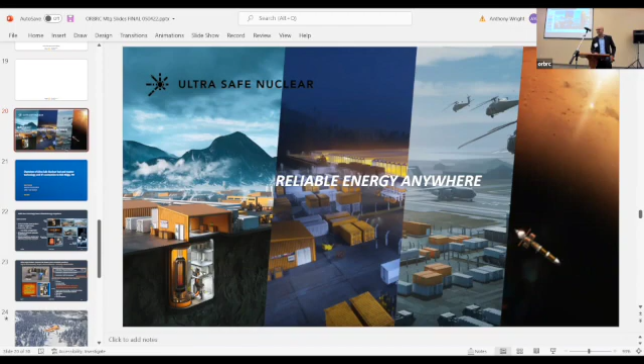Sure, I'll go to this one. Do you want to go full screen? We can see the slides a little better. Oh, really? Okay. I thought it handles it, but that's okay.

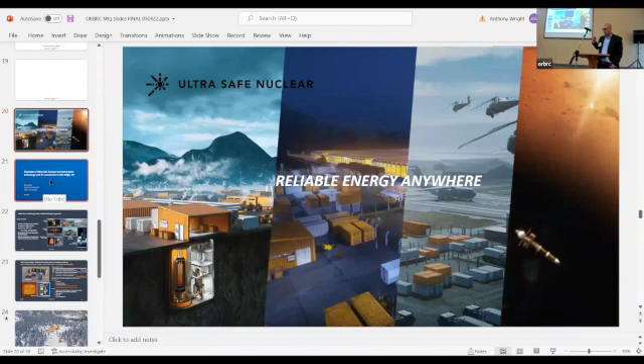Again, as Jim kindly introduced me, I'm Kurt Terrani. I'm talking about UltraSafe Nuclear Corporation. See our motto there, reliable energy anywhere. Let's go to the next slide. The purpose is, as Jim said, for me to tell you about what UltraSafe Nuclear is and what we are doing here in Oak Ridge. And I'll tie it into the local history here, okay? Let's go to the next slide, please.

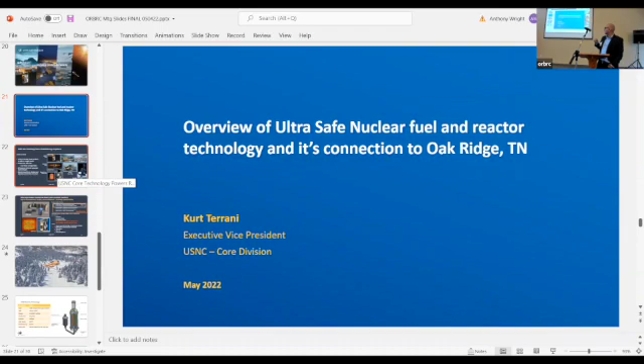We are an advanced energy technology company based on nuclear microreactors. Closer to the microphone, you got it. So we are an energy technology company focused on nuclear microreactors. Microreactors. We're not talking about a gigawatt of heat and electricity. We're talking about just a few megawatts, right? And our technology is high temperature gas-cooled reactors that are microreactors.

Our flagship products are the micro-modular reactor. These are reactors that you can ship to a site, you can build and deploy in a matter of like 30 or 35 weeks, not 15 years and 500% over budget. You know, these are small systems, and you can deploy. You don't need $20 billion, you need tens of millions of dollars to deploy them.

Our first project is in Canada, actually, in Chalk River. We have a joint venture with Ontario Power Generation. That's similar to TVA. It's a big utility in Canada. So that's our first project. And our follow-on projects are in the United States, in Illinois, in Idaho. There's a lot of studies going on in Alaska and elsewhere, okay?

So besides these land-based microreactors, we use the same principles and fundamentals of our technology to develop reactors that are not for Earth, they're for space. So either nuclear thermal propulsion, where you're using the heat generated from a reactor core to heat a gas and launch a rocket instead of burning chemicals, or reactors to provide you power on a lunar surface or Mars. It turns out the hydroelectric dams aren't working so well up there. So that's kind of the gist of the reactor products, right?

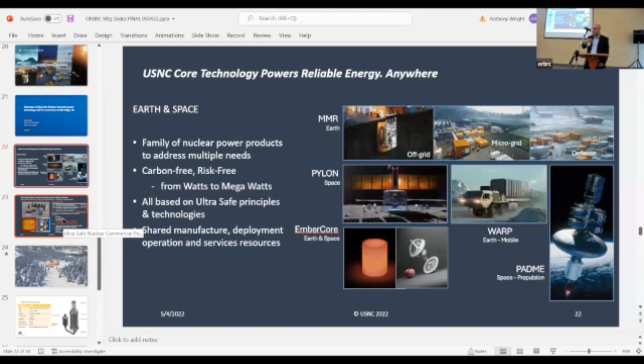So this is all just concepts, but I'm going to tell you a little bit about our philosophy and what we do, especially in my area, which is fuel. Let's go to the next slide. Okay, obviously you probably can't read this and you don't need to read this. Let me tell you what our philosophy is. The name of the company is called UltraSafe.

And basically, if you take a look at the nuclear reactors that exist today commercially, there's about 400 of them around the world. There's just shy of 100 in the United States. And these things are based on Rickover's water-based reactor, whether you like it or not. There's been a lot of reactors built and operated here in Oak Ridge in what Alvin Weinberg called the first nuclear era, a lot of different salt and gas and all these other cool systems. But we ended up using Hyman Rickover's reactor that he deployed for his submarine. These are gargantuan machines. They are, again, about 3 gigawatts.

That's a big number of heat, and about 1 gigawatt of electricity. And so they have this awesome power. They have a very large power density, which means within a small volume they're generating a lot of power. And so it made economic sense back then. They called it economies of scale. And so when you pack this much energy into a small volume, when something goes wrong, it really goes wrong.

And let me give you an analogy. I don't know if you guys watch Game of Thrones, but everybody knows the concept of a dragon. It's a very powerful, mythical beast. So imagine, the Rotary Club next week, you guys go slay a dragon. And you're like, hey, you know what? This thing is very powerful. Let's harvest its power. And then you put it in a cage. And Jim is like, you know what, folks? This is tricky if this dragon gets out. Let's put another cage around it. So we keep putting cages around the dragon to make ourselves feel really good that this beast is not going to get out. But it does eventually get out, right?

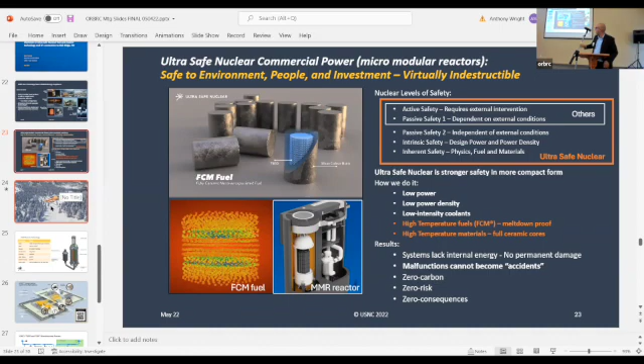Let's go to the next slide. I wonder if you can play this. Yeah, it looks like it.

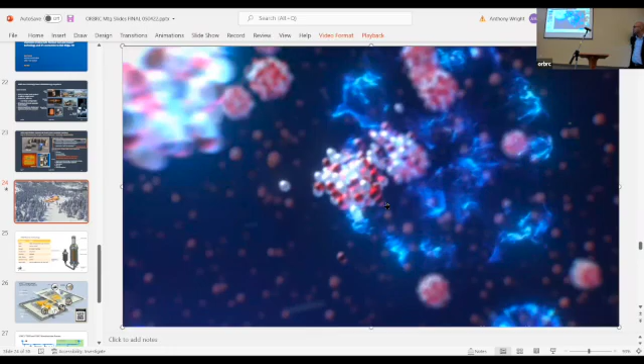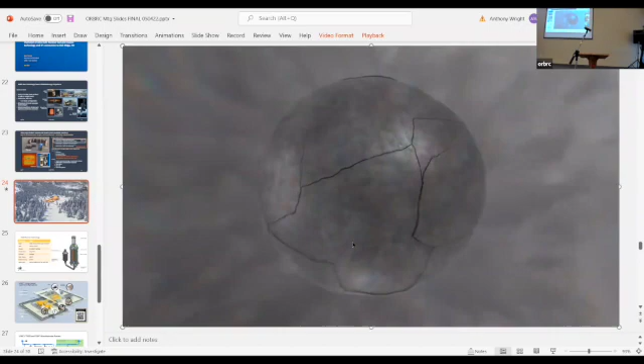This little guy packs a big punch. It's the size of a walnut and can release the same energy as 2,000 liters of diesel. Not bad for a rock. With so much power comes great responsibility. For as fission reactions take place, the uranium fuel is slowly transforming into roughly 1/3 of the periodic table as solids and gases. These are the radioactive fission products that make nuclear waste dangerous, and they must be permanently contained. So beyond generating heat, the fuel needs to trap the fission products in place.

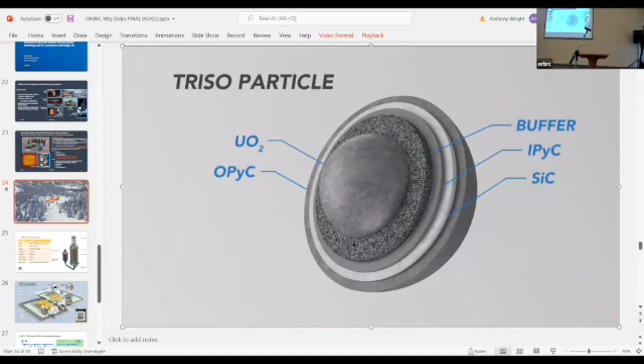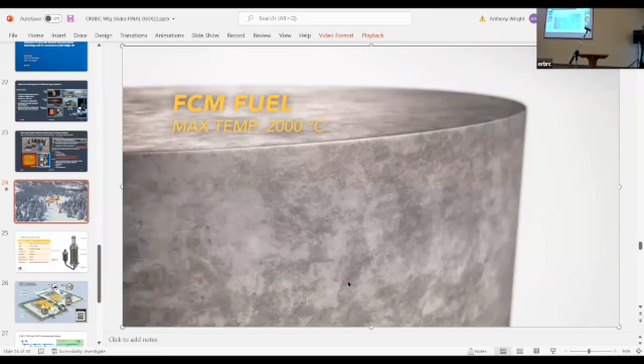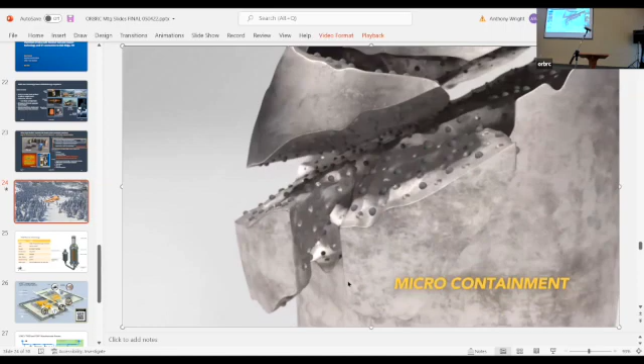In FCM fuel, millimeter-sized bits of uranium are trapped in tiny ceramic pressure vessels that can withstand extreme temperatures and radiation. These particles are then encased within a fully dense silicon carbide matrix, somewhat like encasing the fuel in a diamond. Silicon carbide is used for tank armor and has an extremely high melting temperature, far beyond the heat generated by the fuel. It is particularly resilient to radiation and does not chemically interact with other materials in the reactor. If the pellet is fractured, the fuel particles can remain intact as they are smaller than the smallest fragments. The core is assembled with enough fuel and graphite blocks to produce heat through self-sustaining fission reactions. This fully ceramic core has the lowest power density of any commercial reactor ever.

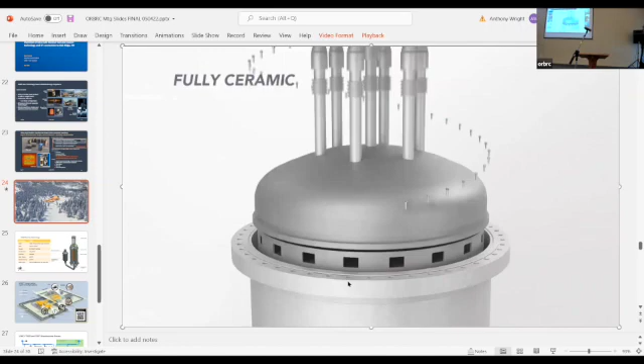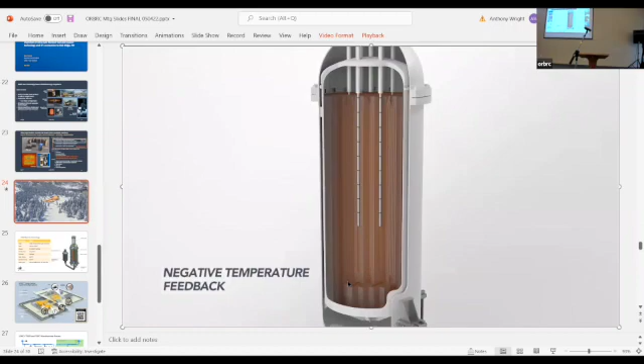Allowing it to easily dissipate excess heat. To power it up, control rods are withdrawn and the fission reactions can begin. But these reactions slow down at higher temperatures. So to keep producing power, the reactor has to be cooled. If cooling stops, the reactor automatically shuts down.

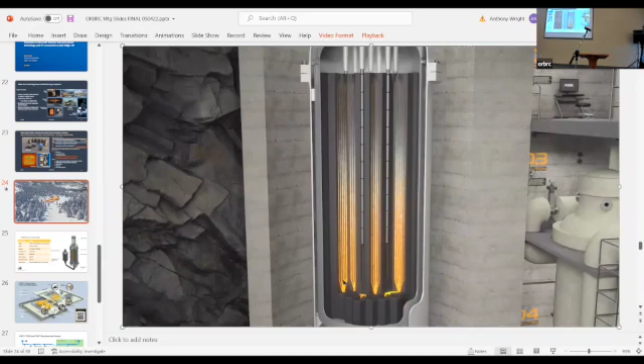Helium carries heat out of the nuclear core. It is a harmless, noble gas, completely unreactive and stable. And while somewhat inefficient, it is the safest coolant available. Now, the problem with nuclear fuel is that it continues to generate heat even after the reactor is powered down. It will continue to generate roughly 1% of the original heat for hours and days to come. And if it's not cooled, that heat will pile up.

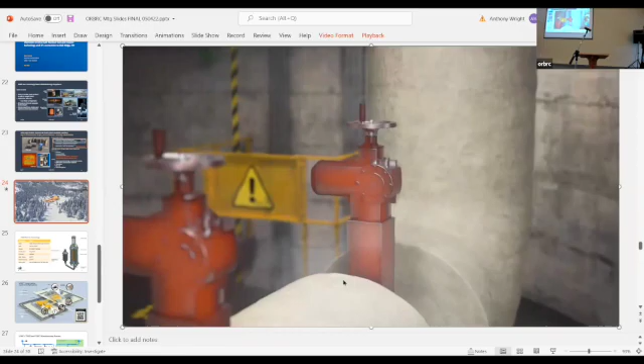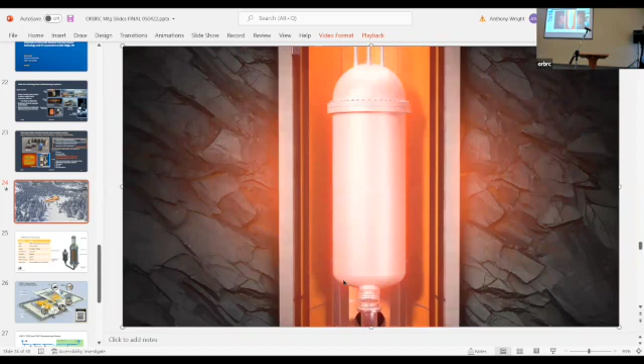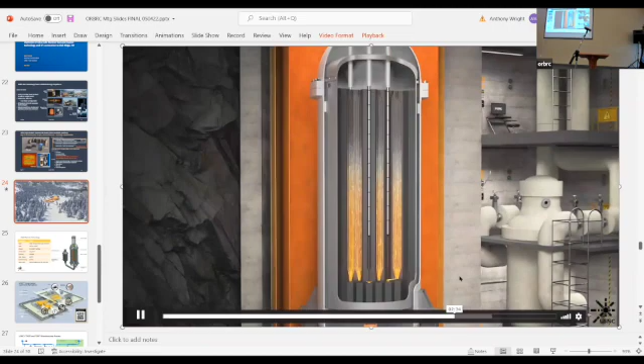The challenge with nuclear has always been to ensure the reactor does not damage itself when cooling is lost. The MMR can dissipate all excess heat passively and harmlessly into the environment in any scenario. Like a warm pot, it cools off just by sitting there. No moving parts or fluids, no operator actions, just simple cooling by conduction and glowing. This means the reactor can tolerate extreme conditions and survive undamaged.

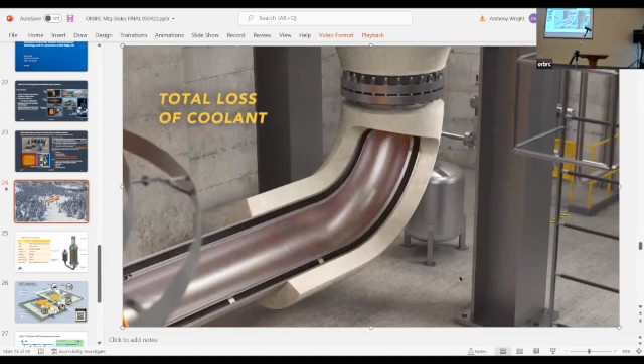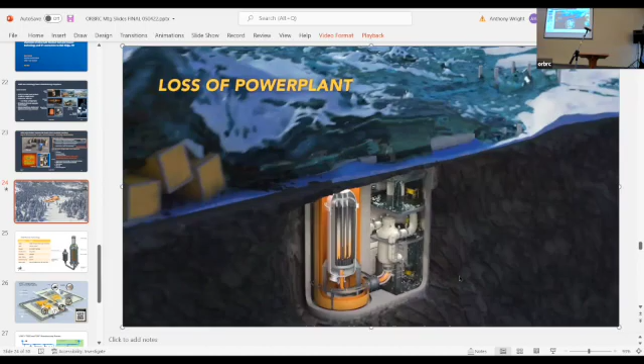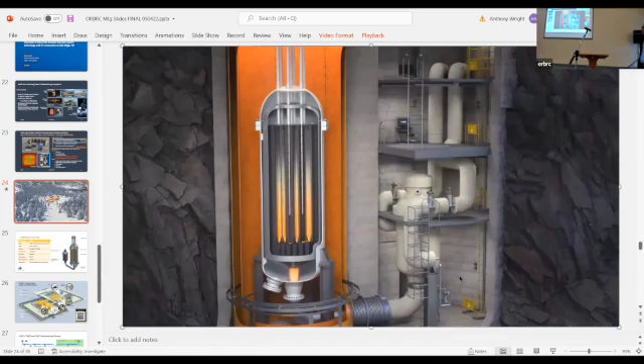Instead of designing elaborate safety systems against particular scenarios, we've designed a reactor that is inherently safe no matter the events. The MMR harnesses the fuel's formidable energy while fully containing its radioactivity during all encountered conditions, be it normal operations, worst-case failures, or permanent storage. This is ultra-safe, the new standard for nuclear safety.

Okay, great. So I think that kind of repeated what I told you. I hope that resonated. Let's skip these reactor slides. That's boring. Let's get to the fuel. So let's go to slide number 27.

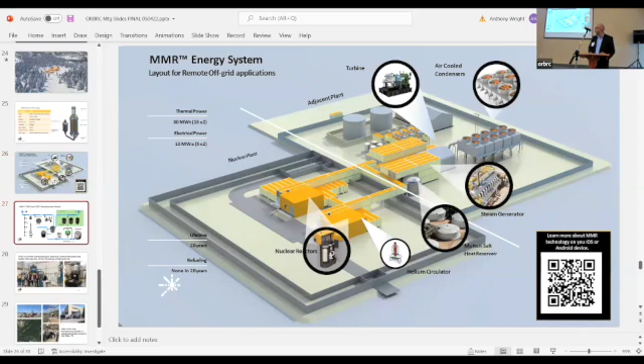Okay. So you heard about the philosophy, you heard about the fuel. So what is this fuel? How do we make it? Well, we are standing on the shoulders of giants here. This is not an invention that we came up with last month. We are using this fuel particle. It's called TRISO fuel particle. It is an idea that came about in the late 50s, and folks were making it here in Oak Ridge in the late 50s, early 60s. And so that technology has been in Oak Ridge for decades.

And when I joined ORNL in 2010, I was working in the group that had been carrying this technology for decades. They are TRISO fuel particles. They are a common motif theme. They keep popping up in a lot of advanced reactors. So the Kairos reactor or a lot of other reactors are using the same fuel particle.

How do we make it? Well, we start on the left, we get some uranium powder, we dissolve it in acid, we mix it with a bunch of other organics, we drip it through a nozzle, we make these gels. And then we cook the gels inside of a furnace, we make them nice and dense, we put them inside of another furnace, we coat them with these coating layers that you heard about.

And then where our technology is kind of unique is where we take this particle and put it inside of the silicon carbide. How do we do that? Well, we use additive manufacturing, 3D printing, believe it or not, for that. And so I used to work with Alan Leiby and a lot of team at ORNL's Manufacturing Demonstration Facility to develop this. So you may see a box on the top right where we are 3D printing silicon carbide and making these cups that eventually host the fuel particles and make our elements.

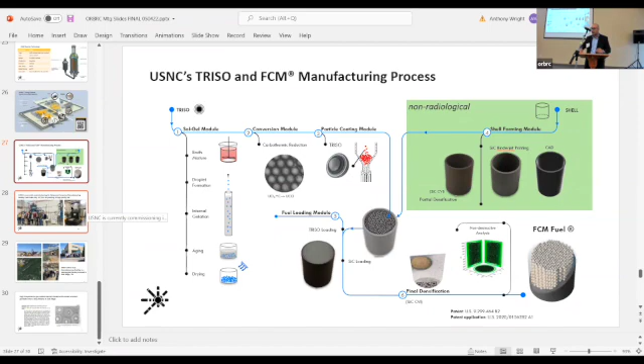If you go to the next slide, this talks about one of the two facilities that my division operates. This is our Advanced Ceramics Manufacturing Facility, ACM. This is a non-radiological facility where we're doing all the silicon carbide 3D printing. Where are we doing that? We're doing that in Salt Lake City, Utah. We've made the investments and installed a lot of equipment over there to do the non-radiological part of our fuel manufacturing.

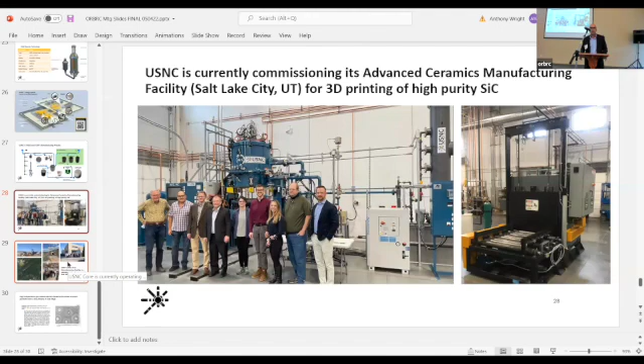If you go to the next slide, you'll see what we're doing here in Oak Ridge, which is all those steps that I talked to you about. Getting uranium, dissolving it in acid, cooking it, coating it, putting it inside of the silicon carbide.

And we're doing this in the old K25, which is now called East Tennessee Technology Park. We came out here and purchased, so a lot of folks think we're operating out of DOE. We are not. There's a lot of folks that are doing that, but this is a genuinely and wholly private entity. We purchased land in K25, we purchased a building, we are doing a major construction over there. You may see some of the pictures with our folks standing in hard hats, et cetera, in our facility.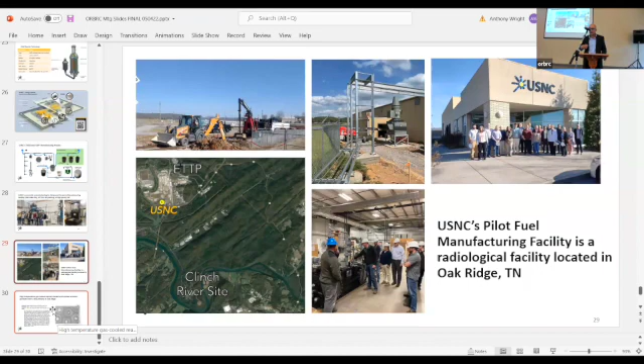And we are installing all of the support equipment to be able to then install all of this equipment for manufacturing of the fuel. I tell you, it's a full contact sport. I mean, with today's supply chain problems and things like that, it has been an extremely stressful and difficult affair. But nonetheless, we've been making pretty good progress, and we are going operational in this facility in summer. We've already received all of our licenses from the state, air permits, water discharge, radiological permits, and we'll be doing uranium processing right down the road from you here.

The idea of how we use additive manufacturing to make the fuel was also a technology that was developed in Oak Ridge National Lab. And I was one of the inventors, and we licensed that technology and took it to the private sector to actually deploy it. So there's a lot of history to this region, and there's a lot of good reason why we're here. It turns out if you want to do uranium processing and radiological work, it's hard to find it in Silicon Valley, San Francisco Bay Area. There isn't the workforce, there isn't the network there, and there isn't the culture to support it. So we're really fortunate to be here, to be able to leverage the community and all the relevant talent that's here. And we hope to continue building and expanding from here.